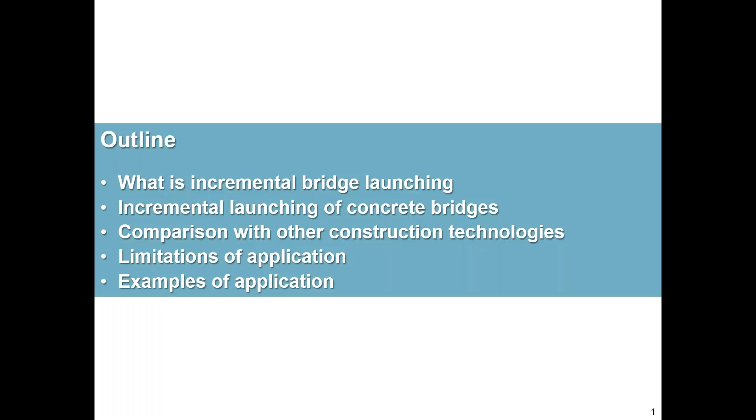Incremental launching was born in Europe in the 60s, but it became way more popular with advancements in the knowledge of materials. Especially the introduction of Teflon was a game changer for this construction technique, because it ended up replacing elements that were greased with motor oil, making sliding bridges way easier. This construction technique is now widely used all over the world, and it is also used in the US.

If we want to mention two memorable bridges: for steel bridges, we can see the approach span of the new New York Bridge. There are some very interesting videos online of this launch. And for post-tension concrete bridges, the Belleair Causeway, which was built in Florida.

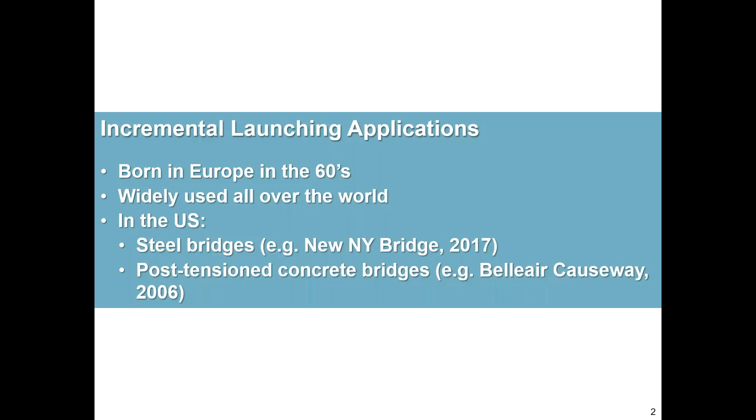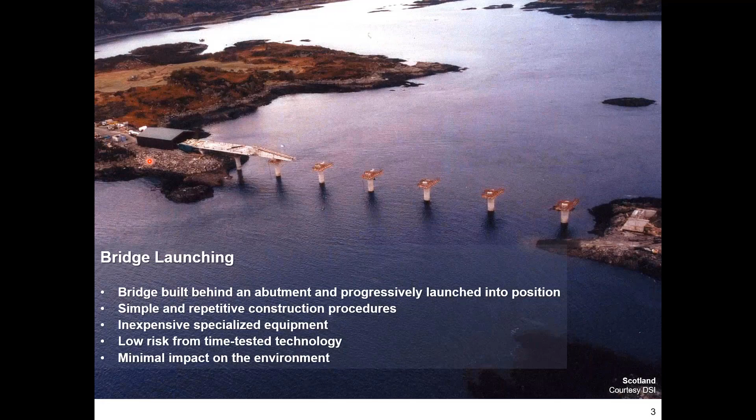We saw before the bridge is built in a fixed facility, so it is sheltered from the elements, but at the same time, the area around the construction area is sheltered too, so it is environmentally friendlier than other construction techniques. This construction technique is usually easier to use local labor and material in support of the local economy, because even if the local crew may not have long experience with this technique, it is very repetitive, so the learning curve is fairly quick.

Now you're looking at a beautiful bridge that was built in Scotland in 2008. For this bridge, the environmental impact was a major concern during construction, since it was built in an estuary, and that is one of the reasons why incremental launching was chosen as a construction method. You can see there's no impact in the estuary. There was another big concern: this area is in the migration path of some bird species, and there was environmental concern in not disrupting this process. That's why they wrapped in green fabric all the areas where the workers were passing by.

Incremental launching does have a minimal impact on active infrastructure. You can see down here, this bridge was launched over 11 active railway lines, and it was constructed in sections, in this case 3 sections, then pushed in 3 pushes. So there is no active work over traffic, no speed restrictions, and the railroads underneath remained electrified. This construction method does have a minimal impact on maintenance of traffic compared to other construction techniques.

We said we were going to focus on cast-in-place concrete bridges. Let's see how we actually build a cast-in-place concrete bridge that will be incrementally launched. First, we build our foundations and piers and place the launching bearings.

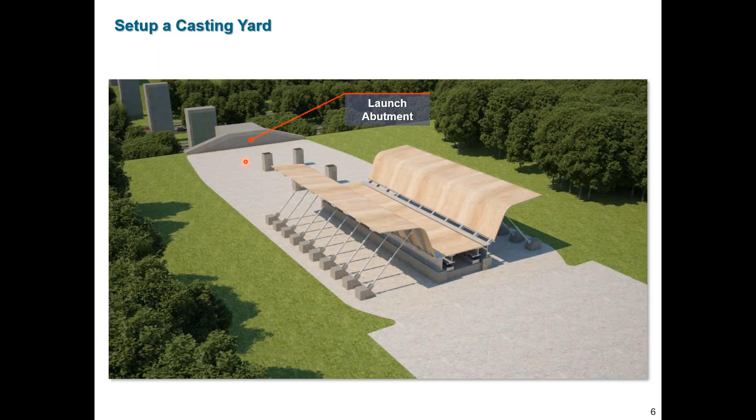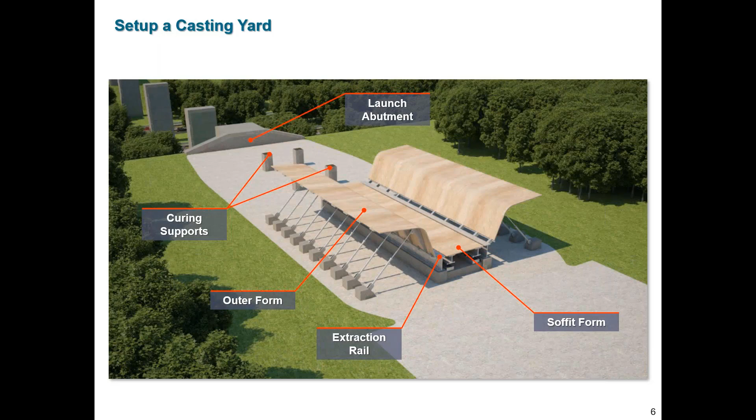While we do that, we start setting up our casting yard. Our casting yard will have a launch abutment, the curing supports, and a formwork made by a soffit form, the outer forms, and the extraction rails, one per side. Then we place the launching nose on the curing area, and we make sure the back part of the launching nose is in contact with the front part of the first segment. It will not just be in contact, it will be securely tied to it.

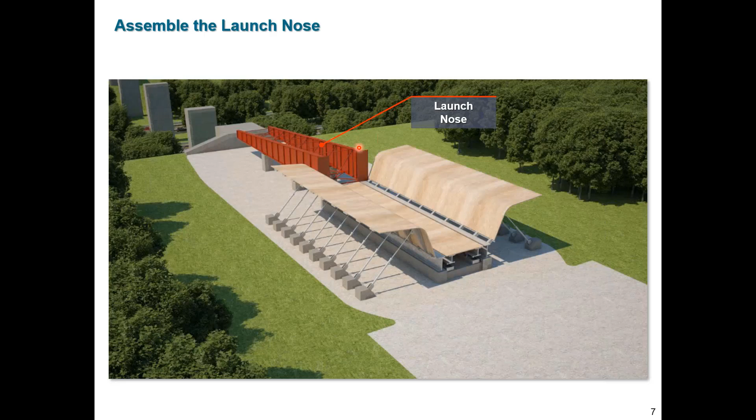Then we set the rebar cage and cast a segment. Once the segment is ready to be taken out of the formwork, we open the outer forms, as you can see here. We lower the soffit form, so now the deck is bearing on the extraction rails.

There are several ways to push ahead these bridges. Today we will focus on one of the simpler applications, which is what you see in this rendering. There are draw cables, the yellow lines, that are anchored to the launch abutment and attached to jacks. And then we have the back thrust beams.

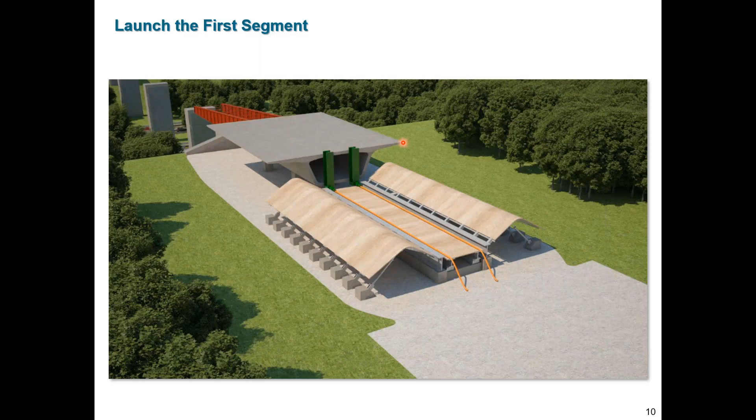These jacks go ahead and push the first segment forward, freeing the formwork for the second segment. The second segment will be cast against the first segment, and the construction joint will have through reinforcement, so it is a fairly solid construction joint.

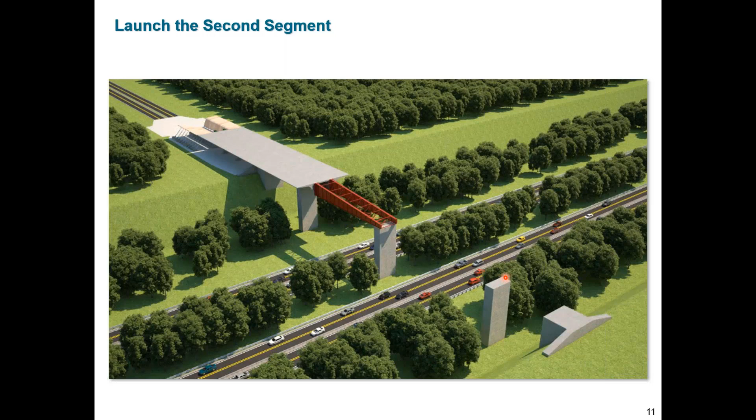This is how the first segment is pushed ahead, and the second segment too. In the previous slide, you saw how the launching nose first was overhanging outside of the abutment. A few segments after, it is bearing on the second pier, and this is done to reduce the weight of the cantilever of the deck. A few segments after that, the launching nose will reach the last pier, and then we will have bridge completion.

So we just saw a simplified rendering of how a cast-in-place bridge is built with incremental launching. Let's see a real-life application.

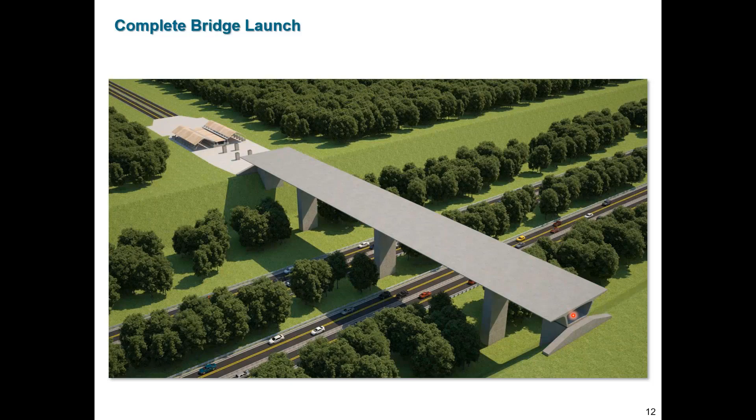This bridge was built in Milan, Italy. As probably most of you know, it is a very densely populated area where disruption of traffic is a serious issue. You can see here the traffic going on while they were setting up the casting yard. This is a real-life application of what we just saw in the rendering. So we have the launch abutment, the curing support, and then our formwork.

We want to have, in terms of room behind the abutment, it is ideal to have at least one span length. This is to avoid problems with overturning. It has also been done with shorter room behind the abutment, but there are some challenges that need to be overcome. So for ideal situations, we want at least one span length behind the abutment.

In the second picture, you can see how they placed the launching nose. It was bearing on the curing support, as we saw in the rendering. At the same time, the crews were working on the formwork.

You can see how the trucks used for launching this bridge, for putting together the segments, are fairly average trucks. There is no special heavy equipment involved with this construction technique. This also has an impact on the surrounding traffic—we don't have heavy equipment moving on the roads surrounding the construction area.

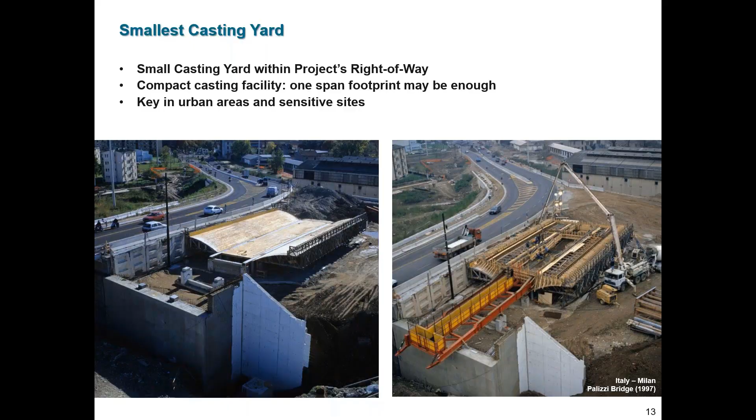In this last picture, you can see the launching nose is now here. You cannot see it from the picture, but it's bearing on the first pier. The first segment is part on the curing area and part overhanging. The formwork is ready for the second segment with through reinforcement.

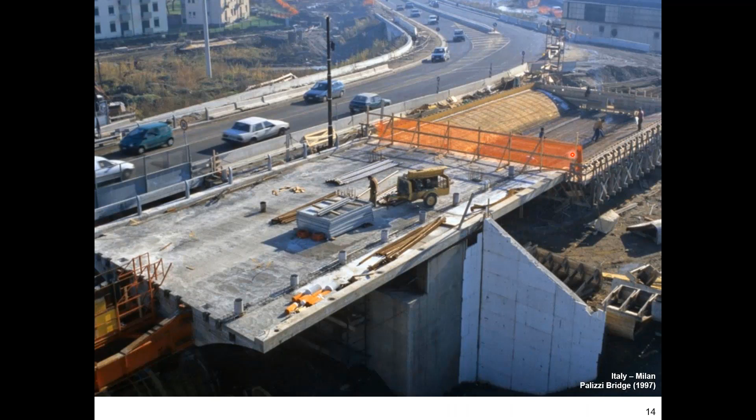You can barely see through the barricade. Workers are getting the cage and everything ready for the second segment, and they're also working on the deck. You can see how the barriers are already in place. So at launch completion, the work that needs to be done on the deck is minimal.

The bridge is pretty much ready to go. That's also part of the reason why this is an ABC application. When we are done launching, the bridge is good to go.

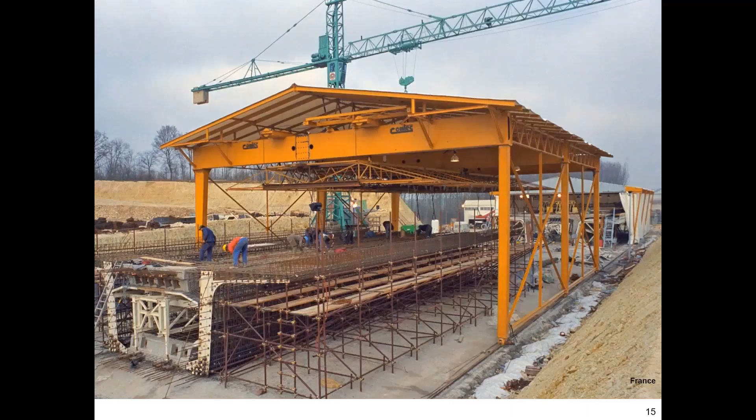The example we just saw was a fairly simple application. For this construction method, the length of the bridge governs the industrialization. We need to find the balance between the equipment we want to use and the labor investment we want to have. This bridge was built in France, and it was a much longer bridge than what we saw before, so they invested in more equipment.

You can see how here in the back, we have the first segment curing, and at the same time, they had more room behind the abutment. So they were also able to have workers setting up the rebar cage while the first segment was curing, so that once the first segment was pushed outside of the formwork, the rebar cage was ready to be moved into the formwork.

As you can see, there is no aerial construction, which is safer for the workers. Typically people are more comfortable when they work on the ground. And when we are more comfortable, we are more accurate, and we're also faster.

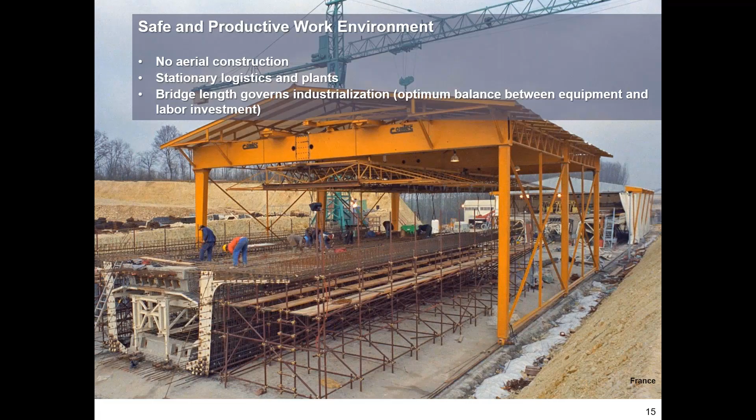We said we were going to look at some limitations of application. For applying incremental launching to bridges, we need to have some geometry requirements. First of all, we need constant depth bridges, and this is just because of the nature of this construction method—we cannot go up and down following a variable depth bridge during launch.

The span length of the bridges can vary from 350 to 5,000 feet. When we work with longer bridges, we can launch from both abutments. This has several advantages: it is faster, because we are working from both sides, and it also reduces the weight of the structure that is pushed forward, so all the maneuvers are much simpler.

Concrete girders have an optimal span range from 65 to 230 feet. For steel girders, we can achieve longer spans, talking about 160 to 550 feet. We can achieve longer spans with steel girders because they're lighter structures, so launching is easier in some aspects.

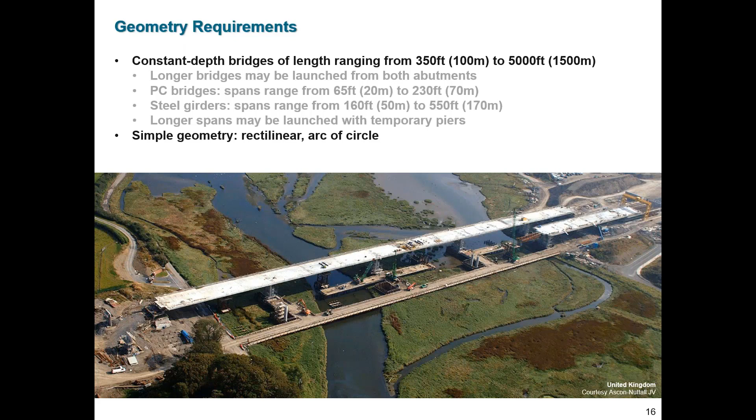There are some design challenges, mostly because of the variation of the static system during launch. During incremental launching, every cross-section is a support section and then a midspan section. So if we look at the section that is here, before it passed through the pier, it was a support section, so it saw some tension in the top and some compression in the bottom. Before that, it was a midspan section, so it saw compression in the top and tension in the bottom. These translate into more material.

So we are talking about 5 to 10% more post-tensioning and reinforcing than bridges cast on falsework, for concrete bridges. And for steel bridges, we are talking about a 7% increase in steel weight for the additional bracing and also the thicker plates that are needed.

So where is the cost saving? The cost saving is on labor and equipment. And we all know the cost of labor is increasing higher and higher.

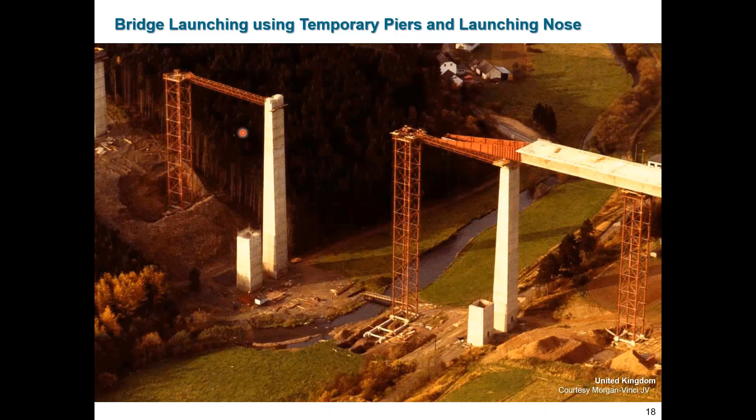So let's compare this construction technique with other construction techniques that can be used for similar span length. For steel bridges, ground crane erection is a simple and inexpensive technology, and it's used very regularly. This makes incremental launching really limited to sites where we have very tall piers or steep abutment slopes.

Like you can see in this picture. So the advantages of incremental launching are that we don't have construction operations under the bridge, and we minimize all the aerial construction.

For steel girders, based on the weight of the structure and the span length, we may or may not use a launching nose. In this case, they did - you can see it here.

For steel bridges, at bridge completion, we can just launch precast panels on top of it, and that makes it an easy application.

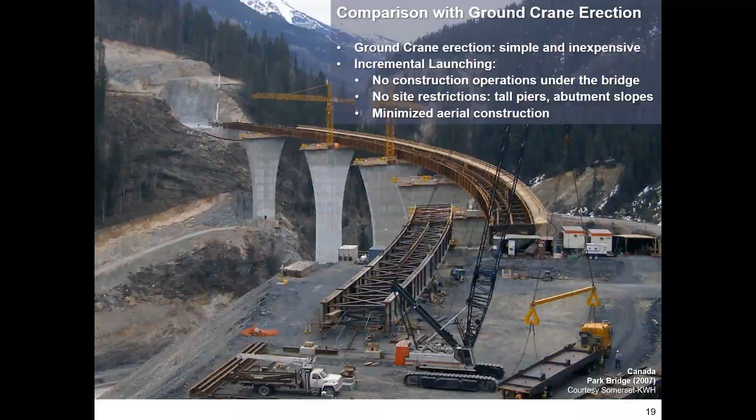And this is just because of the casting of the segment. The launch itself doesn't take a long time.

Going back to our example of a span that is 160 feet long, for precast segments we'll probably have about 16 joints, 16 segments. So we don't have epoxy in the joints. We have through reinforcement, and this is in favor of uniform flexural capacity.

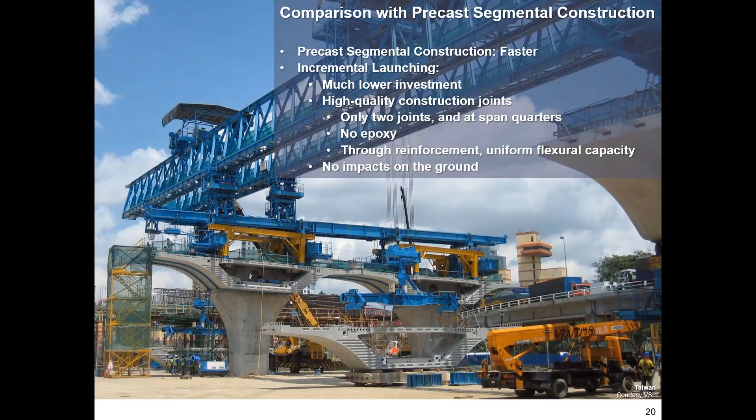There is also no impact on the ground. Here you can see how when we work with precast segments, we need room to stage the segments, and we also need room to maneuver the segments, and we need heavy equipment to move the segments from the precasting yard to the area of construction.

Let's compare this construction method with the movable scaffolding system. Movable scaffolding system is adaptable to irregular bridge geometry. Incremental launching can handle some variations in geometry, but it really works better with simple geometries. On the other hand, incremental launching is less expensive, especially when we consider mobilization or demobilization.

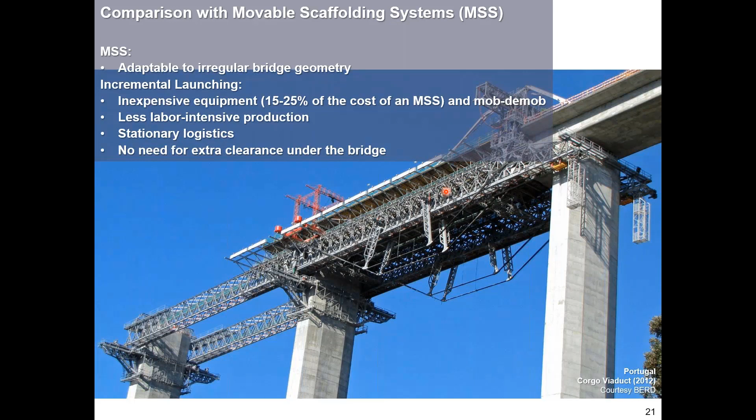If you look at this picture, you can see here is the bottom of the superstructure, and then all this extra clearance is needed just for the MSS itself. Sometimes in urban areas we don't have the luxury of having such large clearance, we are pretty tight, so in that case incremental launching presents some good benefits.

So how do we push ahead these bridges? There are several technologies. As we said before, today we will focus on one of the simpler applications, which is the use of pre-stressing jacks.

This means that we have a short stroke, so typically we use two jacks, one is pushing and the other is recovering. Then once the first one is done pushing, the second one is ready to push, and so on until completion.

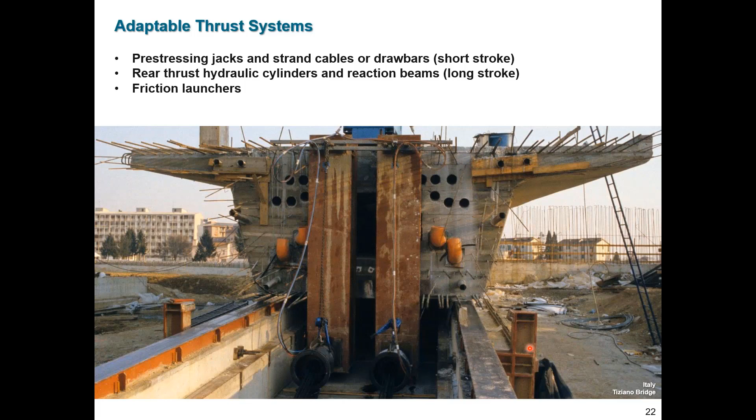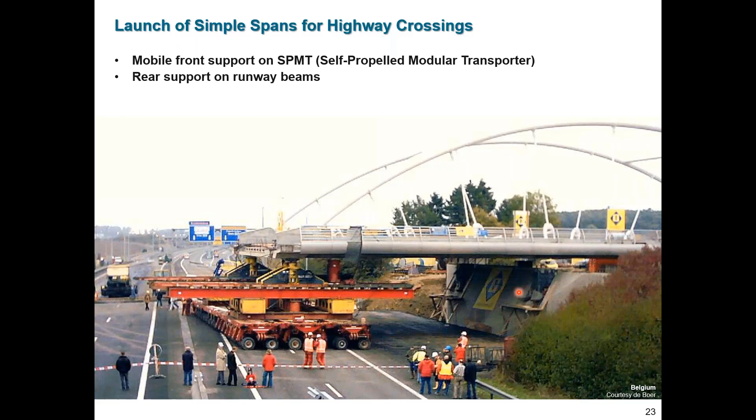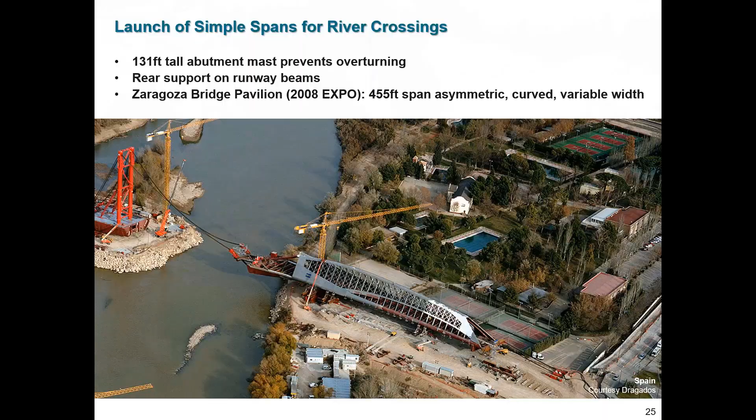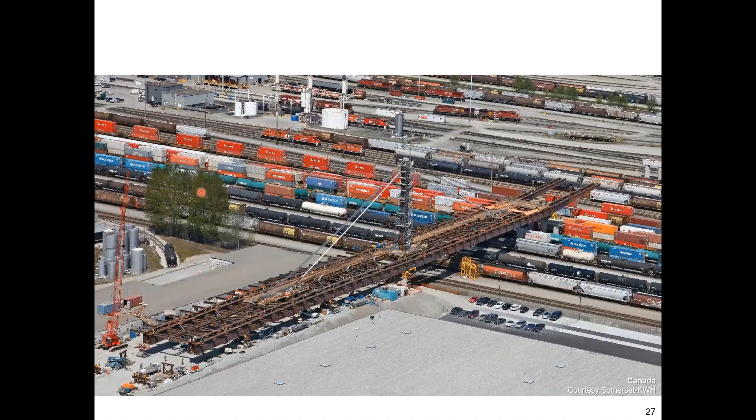So low-level cable stay bridges can also be incrementally launched. Compared to balanced cantilever erection, it is a faster technology, it is less invasive. We work behind the abutment, we set up our structure, and then we started pushing.

In this case, the leading pylon was supporting the front cantilever during launch, and it was also helped by these two launching noses. This bridge was built in Canada, and it was opened in 2010. The other pylons were laying on the bridge during launch, and then they were consecutively erected before opening of the bridge.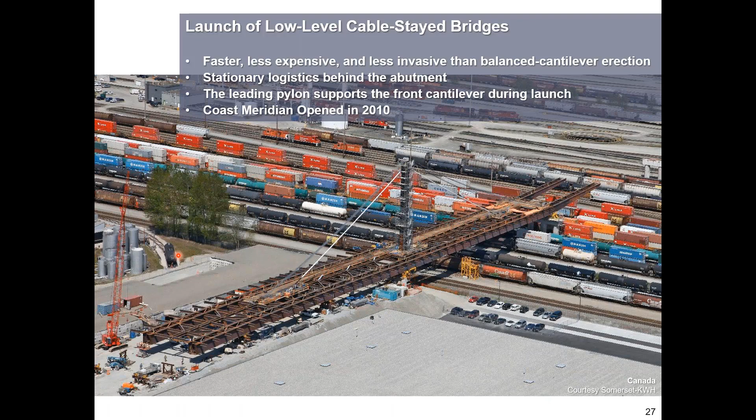Incremental launching has been applied to high-level cable stay bridges. This is a spectacular bridge that was built in France. It is the tallest bridge in the world, and it was incrementally launched. You can see how two leading pylons were supporting the launch, and they also used temporary piers.

So the advantages for high-level cable stay bridges is that the deck that is launched establishes a working platform for cable fabrication. It also makes it easy to access and deliver material through the deck. It's also easier to control the deck geometry, and there are fewer cable tension operations.

So this bridge was launched with these two leading pylons, and then at launch completion, the other pylons were erected, and then the temporary piers were removed. In this way, just having two open sections at the two ends, we have less aeroelastic disturbance during construction, especially for such a high bridge. So the final spans were 1,122 feet, but the launching span, because of this temporary pier, were 561 feet.

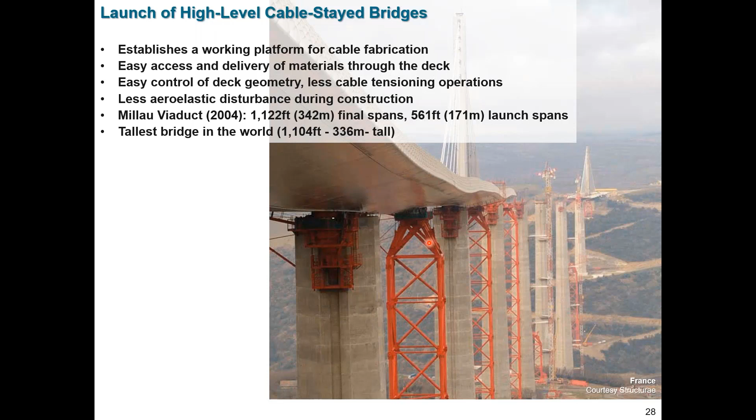Incremental launching has been applied for construction of arch bridges. The lower part of the arch is typically constructed in a more traditional way, and then the deck is launched into position. This is an older bridge, built in 1978 in Germany. There are several applications around the world of this same technique.

What are the advantages? We have longer approach spans compared to other construction techniques, so less piers, less foundations, less cost. We have a lower load imbalance on the arch, and we also only have one learning curve for both the main span and the approaches, because these sections are always the same.

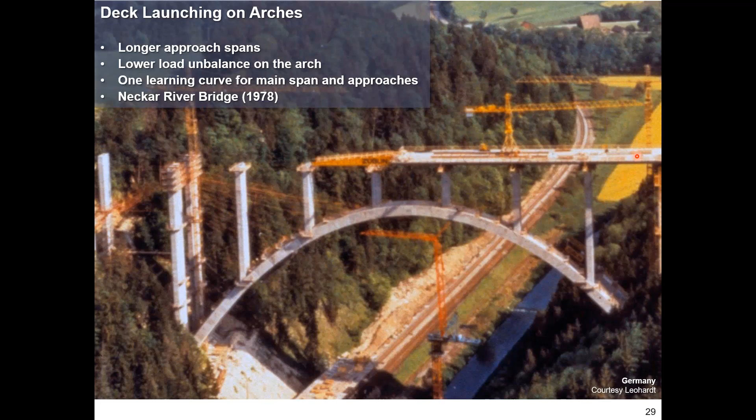You can also see here how they use a launching nose that was varying on two of the verticals of the arch, and the crane that was used for operation on the deck during launch.

Incremental launching has been used for long span bowstring arches. This bridge is a Calatrava bridge that was built in Reggio Emilia in 2007. It's a 30-minute drive from the town where I grew up.

It's a beautiful bridge. The way it was incrementally launched: they launched the continuous span over temporary piers, shown here. During incremental launching, the arch was lying on top of the bridge. At launch completion, they assembled and erected the arch. When the arch was ready, they removed the temporary piers, and that was it. This bridge is also built on one of the oldest highways in Europe.

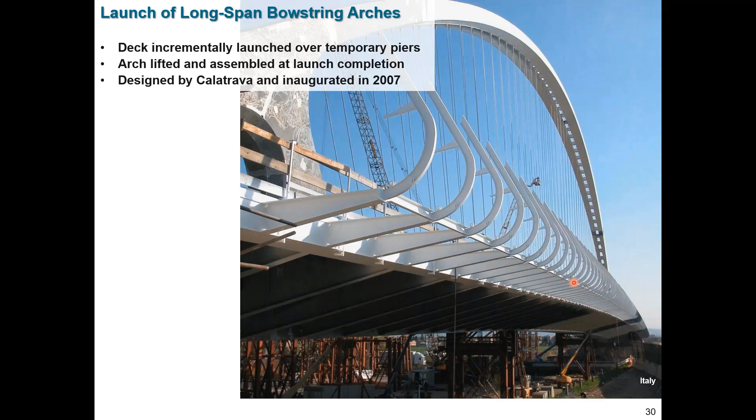Incremental launching has been used in conjunction with bridge skidding for replacement of bridges. On the left-hand side is the bridge that needs to be replaced, and on the right-hand side, the new bridge. These new decks were built behind the abutment and then launched and skid to the side, repeatedly. After the segments are complete behind the abutment, the launch itself is a fairly simple and quick operation. That's why we're talking about ABC.

If you look at these decks, they're completed. You can see rails already in place, and railing too. At launch completion of the new deck, the old deck was skid off of alignment, and the new deck was skid into position.

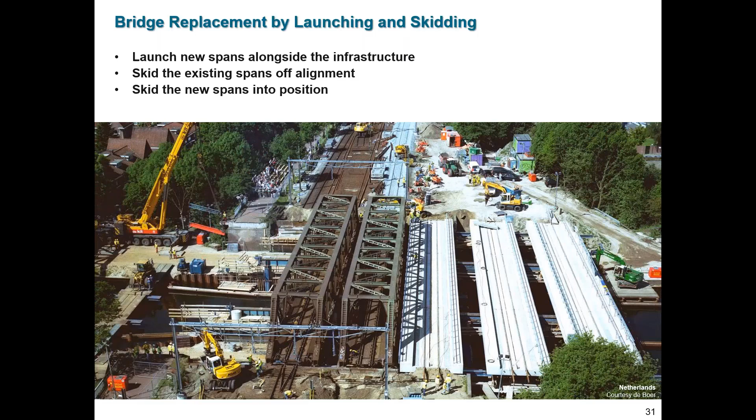Incremental launching has been used also for bridge demolition. This picture was taken in France, and it shows how the old bridge that needs to be demolished was jacked up to make room for incrementally launching an underbridge. The underbridge is this blue beam, now in launching phase, and the end of the launching phase will be up to the end of the bridge.

The bridge was then released onto the underbridge, and then it was skidded along the underbridge for incremental demolition behind the abutment, which is here. I don't have a full picture that shows the whole process, but in this way, the area of demolition was contained, and as a consequence, the impact on the surrounding environment was also contained.

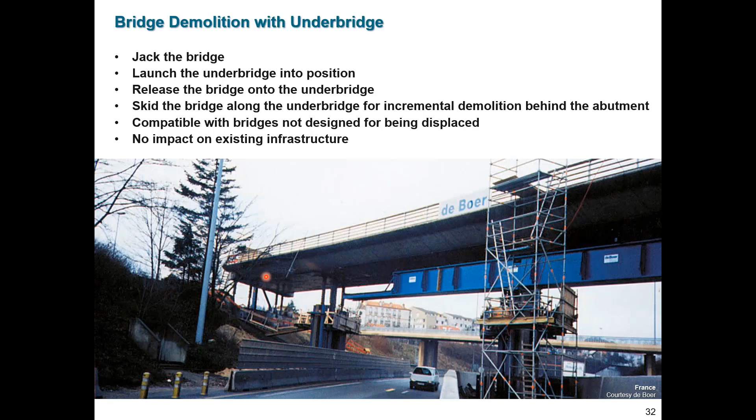This type of demolition does have a minimum impact on the surrounding infrastructures and also on traffic. You can see here a car that is driving under the bridge during these operations.

So what are the optimum conditions for bridge launching? It's great when we need minimal impact crossing, where there is active infrastructure or sensitive areas or areas where the impact on the environment is a real concern—urban bridges where clearance under the bridge is tight. It works very well with medium-length bridges with simple geometry. It can be adapted to more complicated geometry, but this application is at its best when we work with simple geometry.

This construction technique has also been applied to cable stay and arch bridges where the area can be partially disrupted, or when we work aerially at very, very tall elevation. In this picture, you can see the launching nose, and the deck, how it was completed.

There were railings, and also sound barriers during the launch. You can also see the temporary piers, which were anchored to both abutments with stay cables encased in steel tubes. This was to avoid the risk of a broken strand falling on the catenary, because these catenaries that you see here were still fully energized.

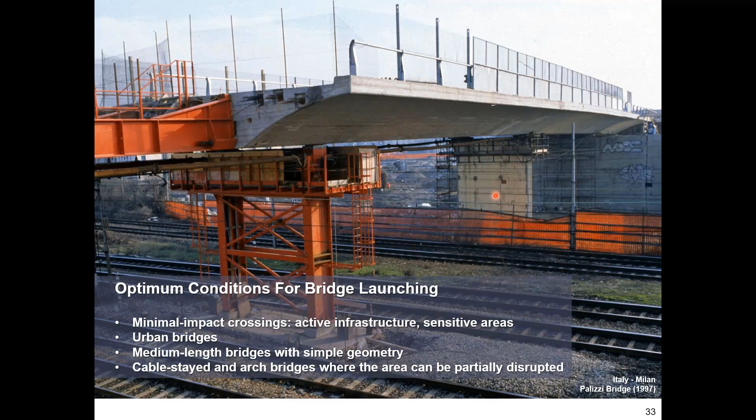And at last, I wanted to show you the steel box girder, because we haven't seen other steel box girders in this presentation. When we launch bridges, we want to have sections that have good torsional behavior. If the section itself does not have it, we need to bump up the bracing. You can see a little bit of a different launching nose than what you saw in other pictures.

For steel bridges, at launch completion, we can incrementally launch precast panels on top of the girders, again to minimize aerial construction and make the construction faster. You can also see how minimal the disruption is to the local environment around the bridge. You can see daisies right under the bridge that is built.

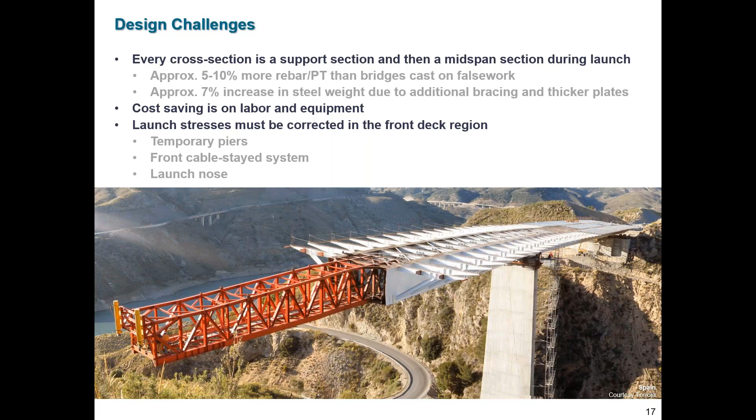Although if the bridge is long and we have room behind both abutments, when the bridge gets very long it gets heavy, so we can launch from both abutments. That reduces the weight of the bridge that is moved.

But again, it's a balance between our span length, the equipment that we have, and the section that we also need for final design. There are not just the launching stresses.

What is the effectiveness of using precast panels for bridge deck slabs?

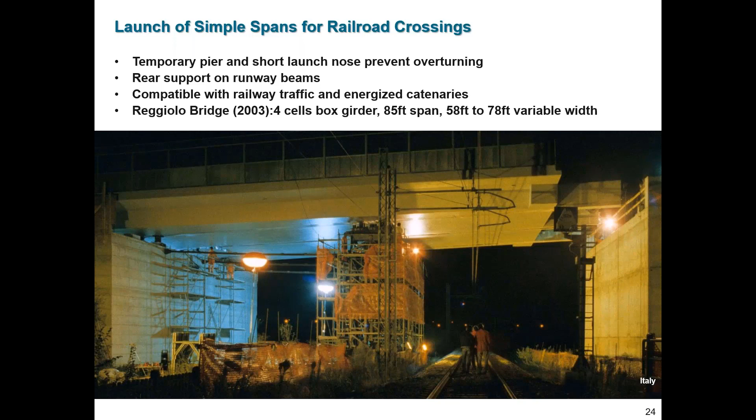Going back to the precast panels, it's pretty much the same advantages that we have for regular steel bridges, because we put the precast panels at launch completion.

So during launch, we only launch the girders. We don't have any deck on top of it. After that, the advantages and disadvantages of precast panels are the same as we see for more traditional construction types.

Another question involved the bearings: what type of bearing pads or sliding elements are typically used during bridge launching activities?

Launching bearings are very interesting. I think we should probably have a presentation just on launching bearings and also the thrust system. Very interesting technology, so I'll try to keep it as short as possible.

We need a different launching bearing whether we're working with a concrete section or steel girders or steel U-girders, because of the different weight of the structure that we're moving, and also because of the flexibility of the section.

So for concrete, we have the simplest application. Typically, a launching bearing for a concrete bridge looks kind of like a sandwich, where we have a concrete block and then an elastomer.

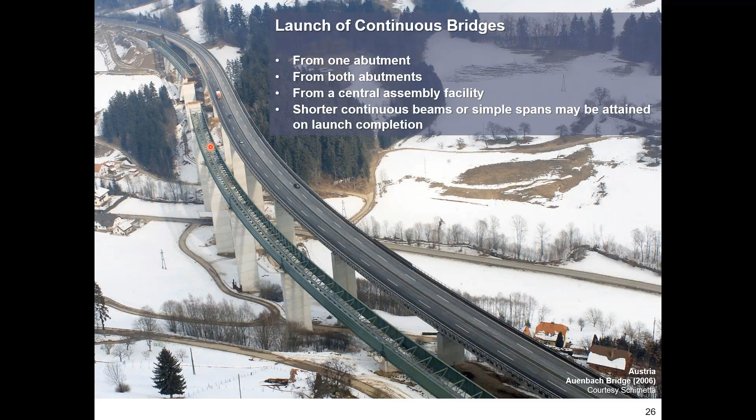Okay, we've answered all the questions that came in beforehand, and I'm just going to go down some of the ones that came in during the presentation. These are pretty good. For slide 5, this question happened several times: was launching permitted with any live load traffic down below? You did mention one where that was going on.

So is that common, or just during the actual launching operation? It really depends. It has been done - you have seen some applications where launching was done on active traffic, with no concerns from the local jurisdiction for those types of bridges. In other cases, it was preferred to stop traffic during the launch operations and then restore traffic.

Now, when we talk about launching operations, we're talking about hours. So even if they decide, sometimes they will stop traffic - say this bridge was built in 3 segments, they will stop traffic after the launch. They will launch a segment. During the launch, they will stop traffic.

While they're building the second segment, traffic will be ongoing. Then they will stop traffic for a few hours, launch the second part. Now we have the bridge up to here, and traffic will be going while they're building behind the abutment. Then they will go to completion without traffic underneath, and then reopen to traffic.

Now, is this necessary? No, it has been done both ways. It really depends on the level of comfort that we have. Okay, a couple questions here. Let's see.

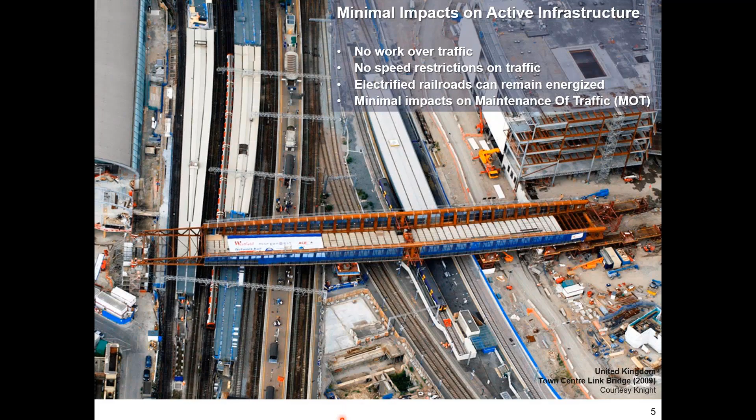For forming segments, is it required to coat the soffit forms with some sort of grease or other bond for the rails? So when we extract the segment, we are just bearing on the extraction rails. The extraction rails are treated to make sliding easier. And the lower part of the form is lowered, so the deck is just bearing on the extraction rails.

And the question on the extraction rails: after casting a segment and lowering the bottom soffit forms, is the just-cast segment supported continuously on the rails or at discrete points? It depends.

Does the length of the launching nose get set based on span length, or is there a specific length for the nose, and then the span length is adjusted accordingly to match?

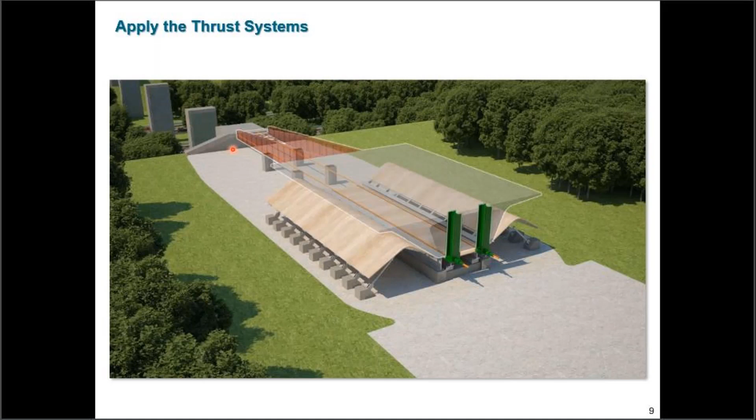Okay, well it's real interesting. I'm going to turn it over to Jugash, and he's going to ask a few more questions. Thank you, Paul. Chiara, the first question I have is, why was the launching technique preferable over a launching gantry crane for the bridge in Scotland? We're talking about this bridge, correct?

So in this case, yes, incremental launching was preferred to other construction techniques because of the smaller environmental impact it has. It was a very sensitive area from an environmental standpoint. There was a major concern in not disrupting the environment, both in the water and outside of it, and on top of it, the migratory movement of the birds. Most other construction techniques would have had either more impact in the water, or the construction of the deck itself would have been more invasive. So this was considered in the design phase. Actually, this bridge is the winner of a Saltire Engineering Award.

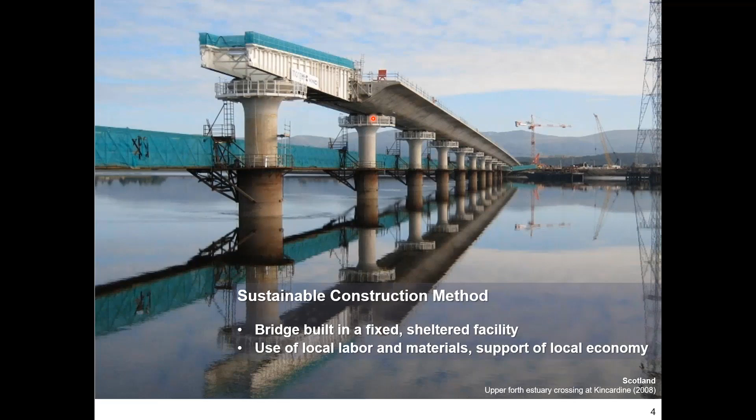Okay, thank you. Next question. For forming segments, is it required to coat the soffit forms with some kind of grease or other bond breaker? I think we already addressed a similar question when we were talking about the extraction rails, but if whoever asked needs more information, feel free to reach out and we can talk about it.

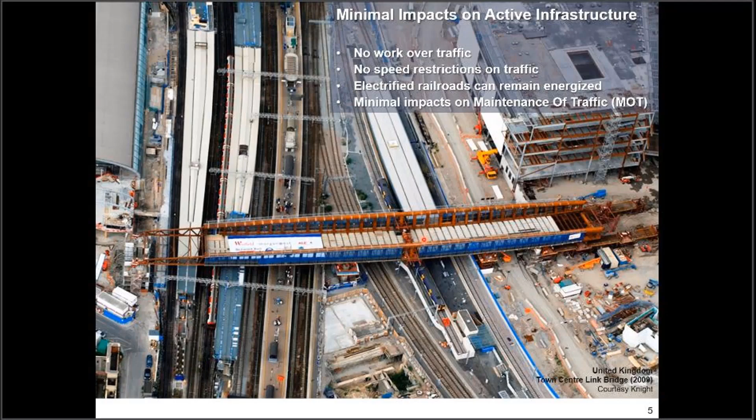Okay, thank you. Next question. How is the launching nose attached to the segment, since it appears to require a strong moment-resisting capability? So the launching nose is attached depending on whether we are attaching to steel bridges or concrete bridges - it's either bolted or post-tensioned into the bridge. And it's true, the connection between the launching nose and the front part of the segment needs to be very well secured.